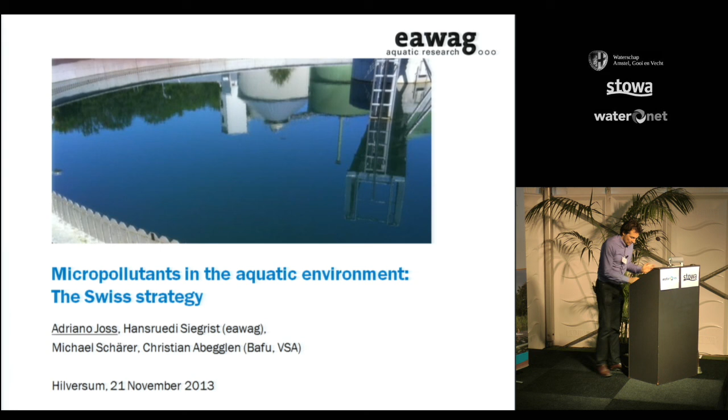But let me get to my topic, which of course is not my personal topic. I'm very happy to try and share a little bit of the logic which I understand behind the Swiss strategies on micropollutants. But of course it's a big work, so I just try to give you the best I can.

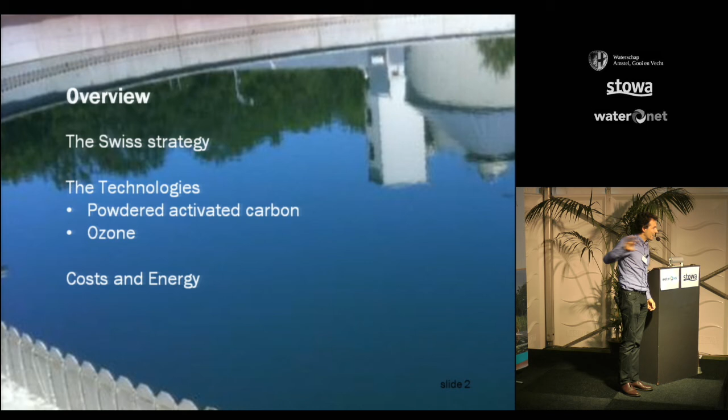My presentation will focus mainly on two parts. First, an overview of the Swiss strategy, and then a look at the two main technologies. Much has been said already on the technologies, but still I think it may be of a certain value to repeat the key points why we did choose these technologies.

The first picture is: what do we have to do? What are the big sources? And here with this picture I'd like to point out one thing. We think, or at least this is part of the Swiss strategy, that we're not only talking about pharmaceuticals. It's a lot of compounds.

We have agriculture there, we have consumer chemicals, we have chemicals used in facades. It's a big wealth of compounds. At the moment we do not really have clear evidence which group of compounds are really the ones that bother.

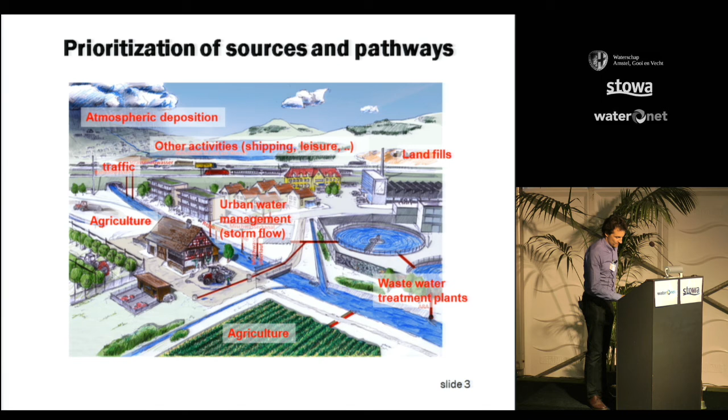So we're facing a lot of sources, a lot of compounds, and we're kind of lost. So what did we do? We did an exercise like was presented before by Barry Pieters or Victor Merch, but on a whole nation level, which in size is not very much different from the Netherlands or from North Rhine-Westphalia.

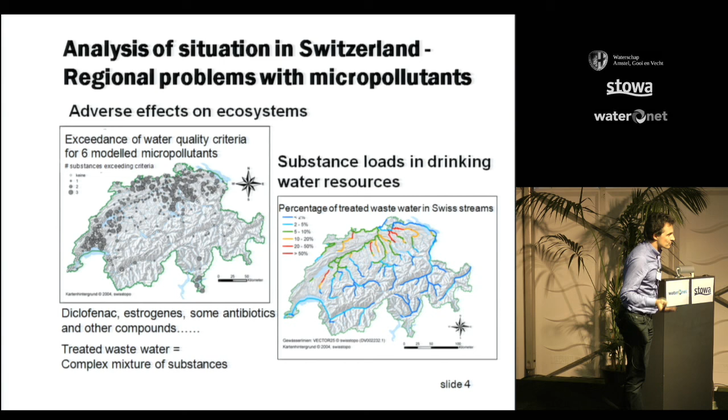We saw in this study, looking at which rivers, due to dilution and discharge, we expect concentrations higher than the effect concentrations we find in the lab. And here is a map of the Swiss rivers, colored in red where those rivers have the highest amount of wastewater in them.

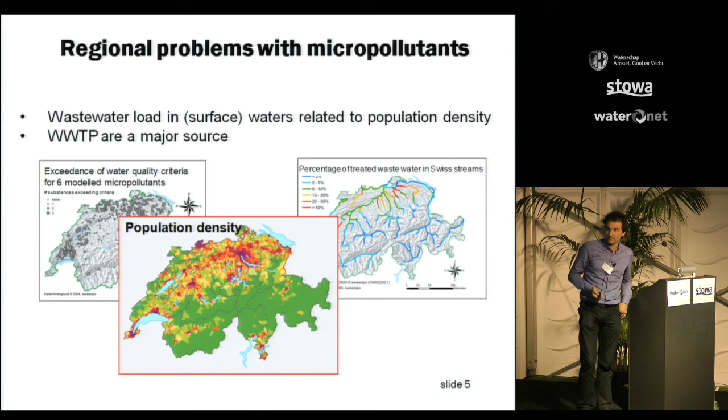And this is the basis of a political discourse, saying well, on this basis we have to do something. Now the first question posed politically is: what could we do? If we were doing something, how would we control it? What would be the goal of a removal?

The studies here - I will not go all the way into details - look at the sources of pollutants, the water bodies, doing a risk assessment, and then evaluating possible measures. This is all summarized in there.

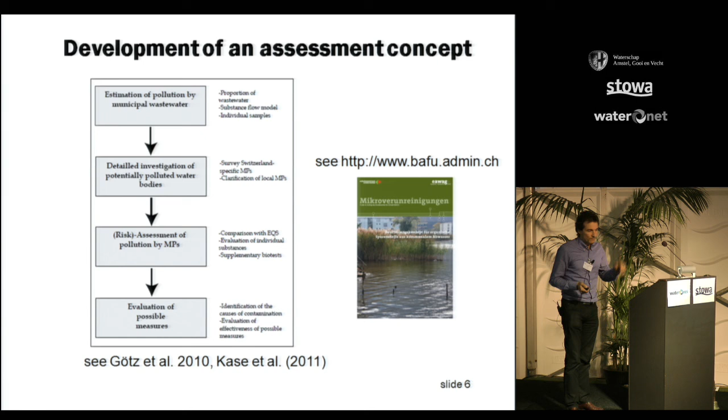The take-home message, or the key outcome of this study, is: yes, we do have 6 compounds which we think are representative of a whole palette of compounds that basically represent the anthropogenic load going through wastewater treatment and into the rivers. So with this study we are convinced we can formulate a target of what we want to remove, and we will be able to measure whether these targets are reached.

The next question is what to do - which technologies, and how, and where, and so on. We'll come to talk a bit later on the strategy, but there is a report which I think is quite nice because it summarizes why some technologies are currently prioritized.

These are powdered activated carbon and ozone. We think that, at least for the moment, these are feasible solutions, these are payable solutions, and this report shows how they would then be dimensioned. So this is summarized in here.

You can download it. I think the English version is not available, but I'm sure the Dutch are very good with languages, and German will not be a problem, or you can go to the French version.

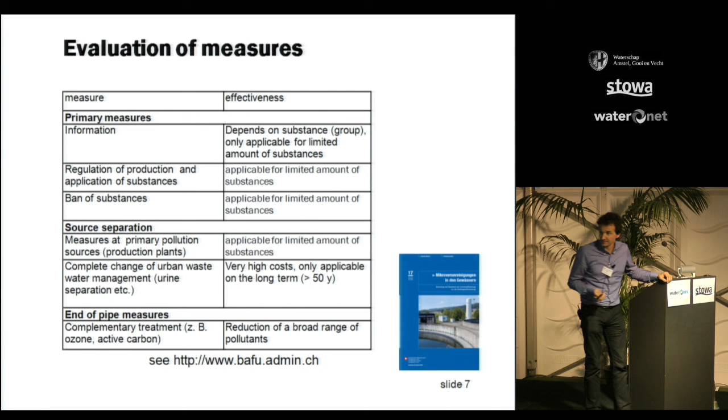Besides refurbishing wastewater treatment, which will be the rest of this talk, I want to make sure that wastewater treatment is not the only focus. Besides that, we do look at source control, and there are ongoing political measures, mainly on green chemistry, on registration and regulation of compounds, on trying to have an informed public which consumes where it makes sense.

But in general, the study clearly showed that all these measures are normally long-term measures, while the implementation of upgrading wastewater treatment plants is termed an easy, quick solution. We can do this rather fast. The measures we will be talking about are to be implemented in the next 20 years, starting from probably 2015.

Then it's thousands of substances. If you think of how long it took for the REACH regulation to be put into place, and how long it will take for the REACH regulation to cover the most important chemicals, we're talking about decades. So going by regulations is a very important step. It's absolutely not forgotten, but it takes probably more time.

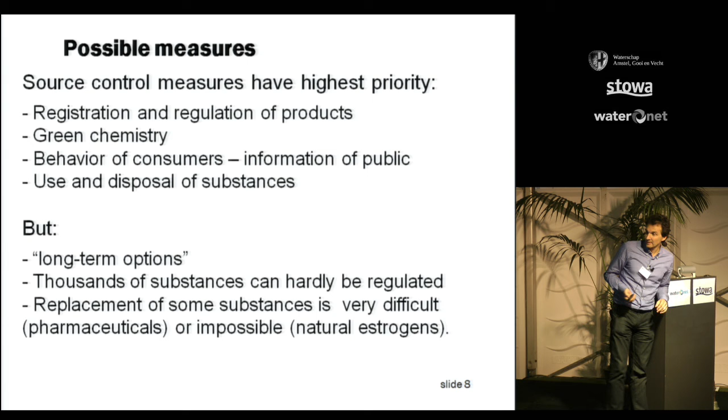Now, what is the ordinance that currently is being discussed in the Parliament? This draft is pretty likely to be passed in a few months. It's very difficult to do a prognosis on when it really passes because it's a political process. But according to what I've been told from the capital city, Bern, it really looks like it's pretty close to going through.

Well, the first key issue is, yes, wastewater treatment plants are recognized, like Viktor Mertsch said, as a key source of pollutants. Then the problem is not everywhere - where we have small rivers and high population, this is where the problems really are. So like Viktor Mertsch said before, the strategy will not be that everybody has to do it, but only selected plants.

Which ones? Well, in Switzerland we're probably around 100 out of 750, so it's a bit less than in North Rhine-Westphalia. Plants will have to be refurbished - which ones? All the big ones, because there the cost effectivity is best. Then also smaller ones from 8,000 person equivalents going upwards, if they discharge in sensitive water or if they discharge in waters serving as drinking water sources.

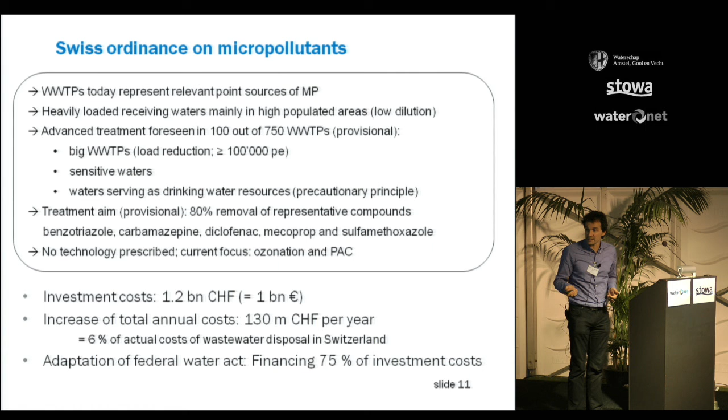So what looks like a very big number tends to not be that big of a sum if you look at what we are already doing today in total. And part of the law is that 75% of the investment costs will be covered basically by tax money, by statal money. The other 25%, as also the operating costs, will be covered by the local municipality. This is what is currently being discussed politically and hopefully gets through in the next couple of months.

Energy and costs - this is a big issue. There is a lot of discussion, for example statements like ozonation costs a lot of energy, it's a waste of energy. We need to look at climate, and climate is priority here.

This was discussed and will still be discussed. The numbers we are showing here in terms of electricity, energy consumption, and cost consumption allow a very clear conclusion, from my point of view. If we have an environmental benefit of advanced treatment, then we can count electricity and cost as probably negligible overall. If we do not have an environmental or drinking water quality advantage, then it's not insignificant money, it's not insignificant additional energy that we consume, and then we should rather not do it.

So what are the numbers? The electricity consumption for wastewater treatment would increase by probably 10 to 30% if we do advanced treatment for micropollutant removal. But this is only 0.1% of the national electricity or national primary energy consumption. So if we as a society want to save energy, wastewater treatment is not the place to focus on - it's an industry sector like any other. But if we get a trade-off from this added electricity consumption, this trade-off may be much more worth it than some added fuel invested in transportation, for example.

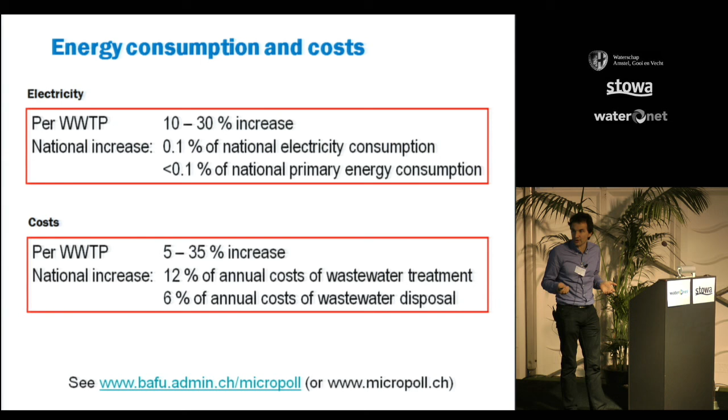In terms of costs, pretty much the same picture, depending on the size of the wastewater treatment plant, and a little bit also on process choice and local conditions: between 5 and 35% increased costs. In terms of annual costs, that's 12% of the wastewater treatment cost, or 6% of the total wastewater disposal cost including sewer costs.

The ongoing work - one thing that struck me a little during this political discussion in Switzerland, from quite the very start, was that the Federal Office of the Environment did quite some piloting to confirm that ozonation and powdered activated carbon could be potential technologies, and what they would cost. But once this was shown, the political discourse never really was about whether to do something or not, but was always on the financing solution and which measures are to be planned - rather how to do it, not if to do it at all.

In Germany now the discussion is picking up pretty much, but at least for a year or so the discussion was still a lot ongoing about whether to do something or not, while in Switzerland this was never really a big issue on a political level. The detailed financing solution is still a little bit discussed. I don't know whether it may be possible that in the political discourse this will delay a final decision because a suitable solution has not yet been found - this is still possible.

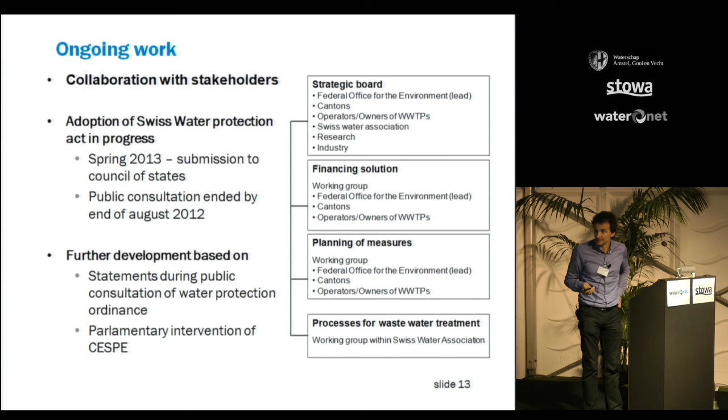This concludes the Swiss strategy, and now to the technologies. First, what do the technologies need to do? Well, we need broadband removal. We don't want to focus on estrogens or gadolinium only, or single compounds. We have a mixture of compounds occurring and we want a solution that actually covers this mixture, because currently we do not have a clue which compounds really matter and which ones don't.

Then transformation products are an issue. Some biological degradation to a far extent just transforms compounds - it doesn't really metabolize or mineralize the compound itself. So there is an open point on the relevance of transformation products. It's been looked at, and it will still be looked at for some years to come. Then the applicability - the personnel we have today operating the wastewater treatment plant must be in a position to operate the technologies. And then, of course, the cost benefit must fit.

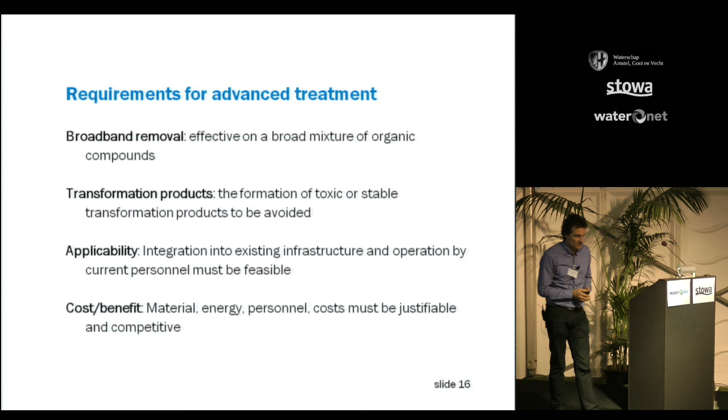What technologies are thinkable? Well, there is quite a palette: adsorption, biological degradation, physical-chemical treatment like nanofiltration, reverse osmosis - so dense membranes - and oxidation. A lot of technologies have been proposed, and I think we're looking forward to a time where further technologies are to be proposed, and we should be careful in looking at them. At the moment, at least this is our state of knowledge: powdered activated carbon and ozone stand out amongst the most cost-effective, for sure among the top ones, and in the following is a listing of why.

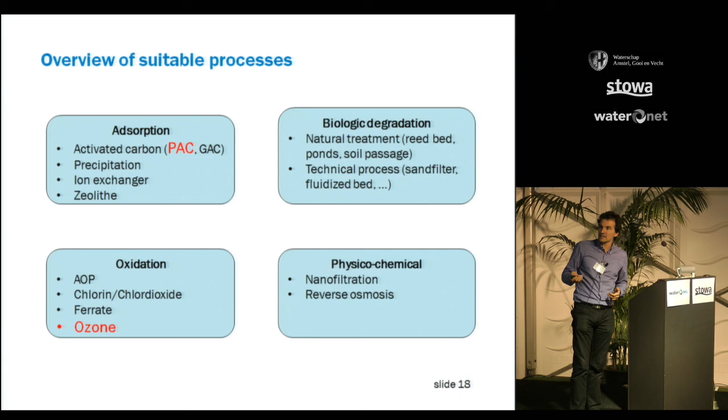The thinking is having at least two options. Whatever you come up with as new technologies, here is what you have to rate against. If you're better, very good, we're all very happy. Otherwise, we kind of stick to what we have. So, powdered activated carbon and granular activated carbon - I think your experience is further than ours, so there is not much sense in me talking about this.

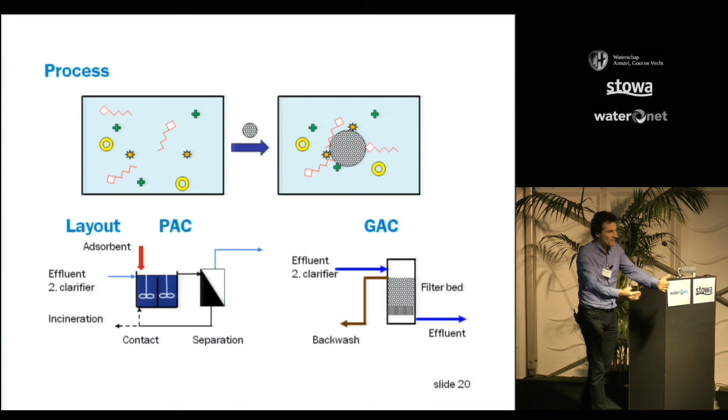Powdered activated carbon - the scheme here shall tell you it's meant to work as sorption only. Here we have a filter just next door which does biological degradation and sorption as well. Powdered activated carbon will never stay in a system long enough to really count as a growth media and then do biological degradation. So in an easy scheme, we have a reaction container and then some kind of means to retain the powdered activated carbon.

This increases your sludge production by maybe 10% or so, but this increases the efficiency of the activated carbon quite a bit. The rationale behind this is, to my knowledge, not very clearly shown - so a bit speculative - but very probably, if you recycle the spent carbon to the biology, you end up adsorbing some compounds which would compete with the target compounds. So the DOC level is a bit lower if you bring the carbon back, and therefore the efficiency ends up being higher. But please take this interpretation as a bit speculative.

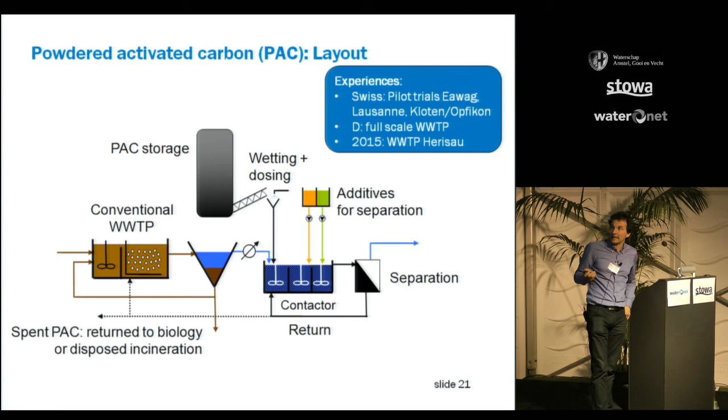What is the experience? Some piloting in Switzerland has been done at quite a decent scale, but in Germany we have full-scale wastewater treatment plants, which according to what I've been told is mainly because they have a discharge fee on the organic constituent of the wastewater discharged into the river. This actually in Mannheim and also in southern Germany pays for most of the activated carbon dosing, because the fee they would have to pay otherwise would be higher. In Switzerland, the first plant will go into operation in 2015.

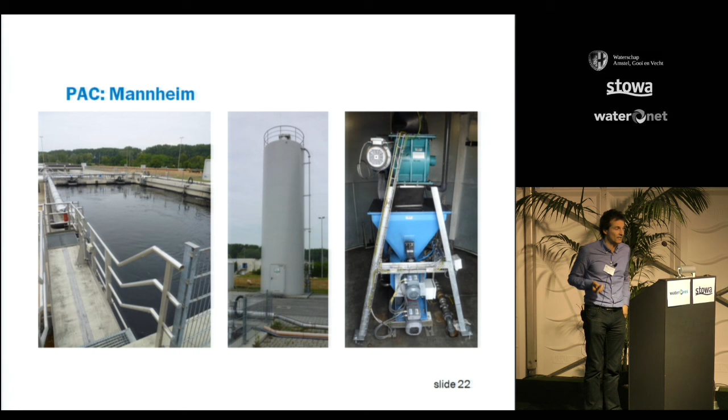A couple of pictures from the unit in Mannheim, where the carbon is recycled to the activated sludge, which then, of course, looks pretty much black.

This is for Swiss wastewater, which has a chemical oxygen demand, a COD of roughly 300-400 milligrams per liter. Compared to German wastewater, which is typically a little bit more diluted - I don't know how it is for the Netherlands, but on average it's rather diluted wastewater - it might be that if you go to higher wastewater concentration, the doses are a bit higher.

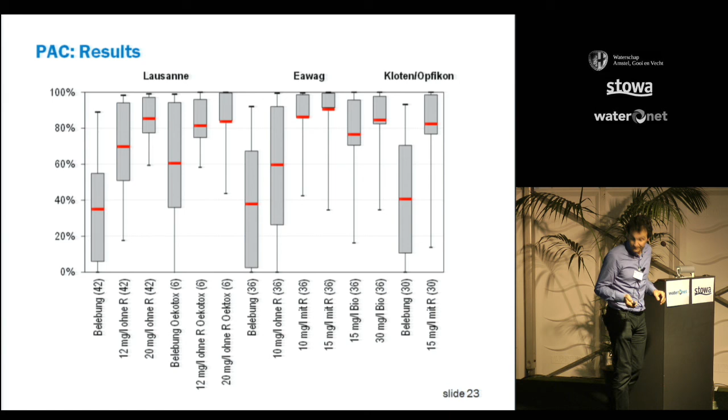How about the other criteria that advanced treatment has to comply with? Well, we have seen the broadband effectivity - this is very good, this is given. Transformation products - we have none, because whatever gets sorbed onto the powdered activated carbon goes onto the sludge.

The sludge is incinerated in the end, and within incineration we have complete mineralization to carbon dioxide and water. But we do have some powdered activated carbon loss in the effluent. This is still to be confirmed, how exactly to retain the carbon sufficiently. So this is a little bit of an open issue.

The applicability is good - this is shown in full-scale plants in Germany, that the operators can handle it. There are some corrosion and abrasion problems, so pumping may still cause slight problems, but it's expected from experience in drinking water that there are technical solutions. Then also the cost benefit, with between 5 cents and 40 cents per cubic meter of water - the cost effectivity is roughly given.

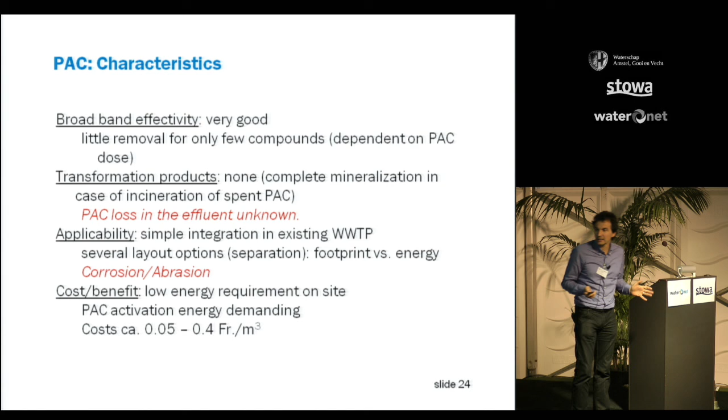Ozone. With ozone, the principle is that we chemically crack the compounds, and we're left with transformation products. A number of transformation products have been looked at in terms of biological activity, and the great majority that we've seen up to now have shown to, on first ozone attack, completely lose their effectivity. These are estrogens, all the antibiotics that have been looked at, and a few compounds more. As soon as they're attacked by ozone, their effect just disappears.

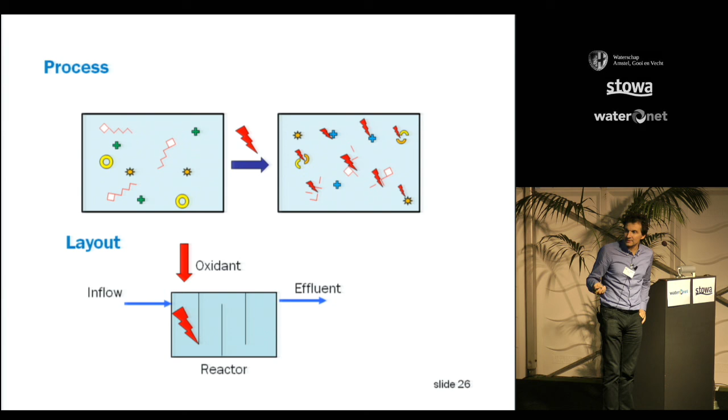The reactor - how does it look like? Well, we have to add the ozone, and then we have a chamber where ozone is brought into solution, and then a plug flow reactor where the reaction can take place. A little bit more in detail, we need to store the oxygen, because normally - only in small plants - you would extract the oxygen from the air.

If you have a bigger plant, it's better to truck in the oxygen. Then you have a generator, then a bubble column. This has to be 4 meters or more, and you have a plug flow reactor with about 20 minutes of contact time. You end up forming reactive compounds like aldehydes and ketones, and that's why, in Switzerland at least, we advise having a sand filter afterward. This sand filter doesn't retain particulates, but grows a biofilm so that whatever reactive compounds come out will react there and not be discharged into the river. So this is the technology.

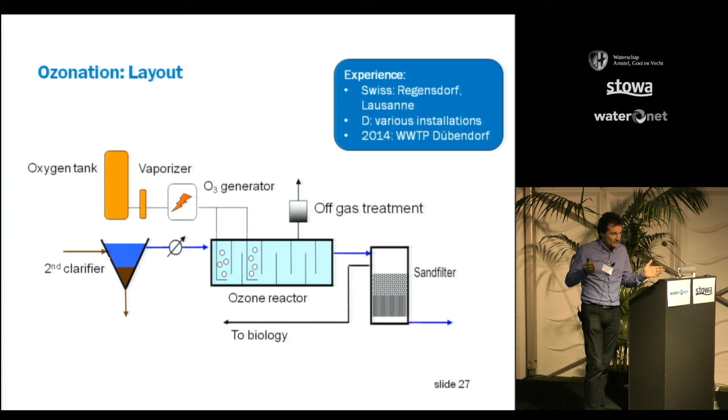Where does the experience come from? We did some piloting on full scale for 1 or 2 years in Regensdorf and Lausanne. Some plants on full scale are already equipped in France and Germany, and in January 2014, very close to EAWAG where we are, the first ozonation plant will go into operation. We also have between 5 and 10 research programs going on, to see how we control ozone dosage during rain weather, whether we can avoid a sand filter, or whether we're better off putting a GAC filter here instead.

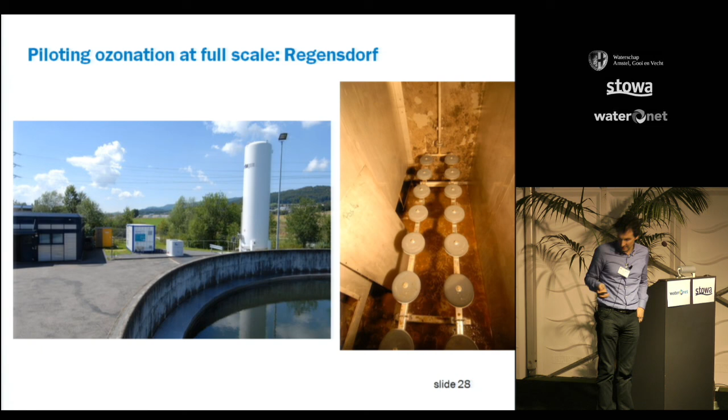This is a look into the reactor, and here is the oxygen tank of the piloting plant in Regensdorf. This was a 50,000 person equivalent plant. This is the generator, and in here are the filters, the ozone reactors.

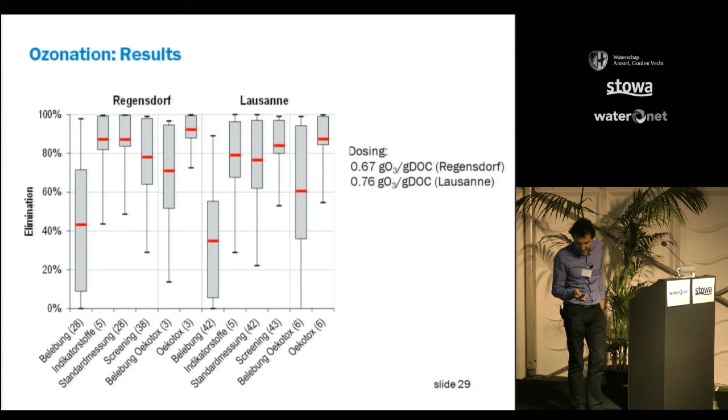So the criteria to rate ozonation: the broadband effectivity is very good in terms of primary reactions. There are transformation products formed, quite a multiplicity, and there's still a question mark on whether we've looked at all the relevant effects to really state that they have no relevant effect - but up to now we haven't seen any. Bromate formation can be a problem if you have a lot of bromide, so if saline or marine water intrusions are an issue, bromate could be a problem. Nitrosamine formation can be a problem in some places, but to a large extent it's solved by the sand filter.

So at the moment there's no reason for transformation products to be a no-go for the technology, and the applicability is good. The ozone reactor is quite easy for personnel to handle, with a bit of awareness and education around safety - ozone is explosive, ozone is toxic, but then you can handle the plant. The cost benefit is also a bit better; we calculate between 5 and 20 cents per cubic meter. It's a bit lower, but costs are not the key point in discriminating between processes.

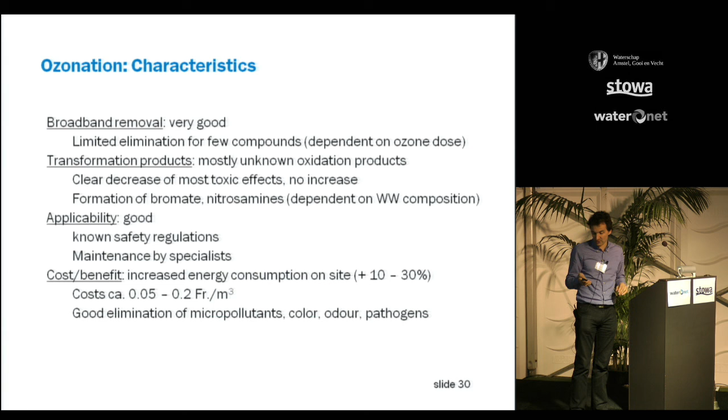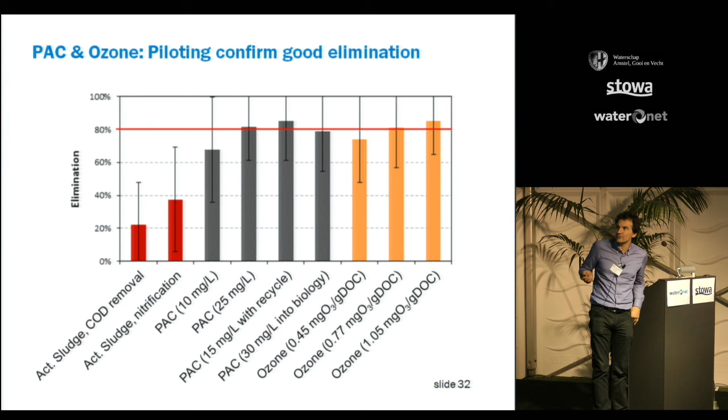One important fact for ozonation is that we get 2 or 3 log units of pathogen or microbe removal, whereas with powdered activated carbon filtration we normally get only about 1 log unit. So if bathing water quality is a big topic, this could matter for ozonation. Looking again at cost effectivity, with proper dosage - 10 or 25 milligrams of PAC, or between half and 1 milligram of ozone depending on DOC level - you can reach 80% removal, you can reach the goal.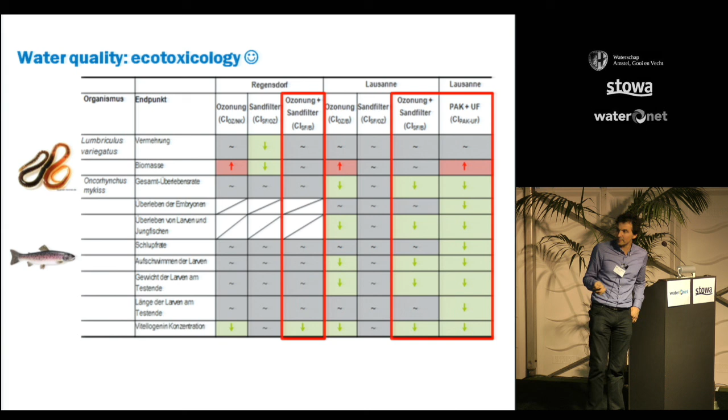Also, looking at the range of ecotoxicity measures - fish early life stage, worm effects, photosynthetic effects - on average you get better water quality; only in very rare cases does it worsen. As a more engineering-oriented person without much toxicology experience, I have the impression that not the last word has been said on which tests really monitor quality. There may be discussion in coming years on which tests are relevant. But at the moment we do see a clear picture: advanced treatment in terms of effect measurements normally gets a positive reduction, both in vitro and in vivo.

Costs and energy, we can put them again because they're quite important. If we compare ozonation and powdered activated carbon in a dosage typical for Swiss wastewater, we see that in terms of on-site consumption, ozone is a little higher than powdered activated carbon. But if we calculate primary energy, including the energy needed to activate the carbon, ozonation is a bit cheaper.

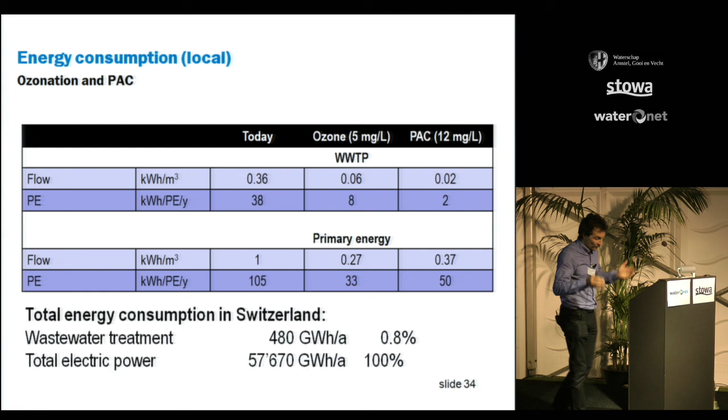But again, this is not the major point. The major point is that if we compare the consumption that advanced treatment for the Swiss strategy would consume to the entire electricity consumption of Switzerland, we see that we would increase electricity consumption for Switzerland by less than 1%.

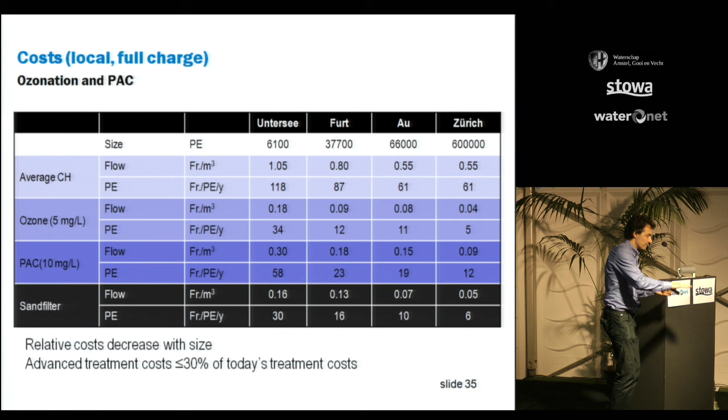The costs, again, here we did some cost estimation for small wastewater treatment plants, 6,000, or big ones, 600,000 person equivalents. You can find the numbers in your handouts. The key take-home message is the price is size dependent, and if you don't have a sand filter, this costs normally more than ozonation or powdered activated carbon. Also, if you have to refurbish a COD removing plant, upgrading it to nitrification costs factors more than implementing ozonation or powdered activated carbon.

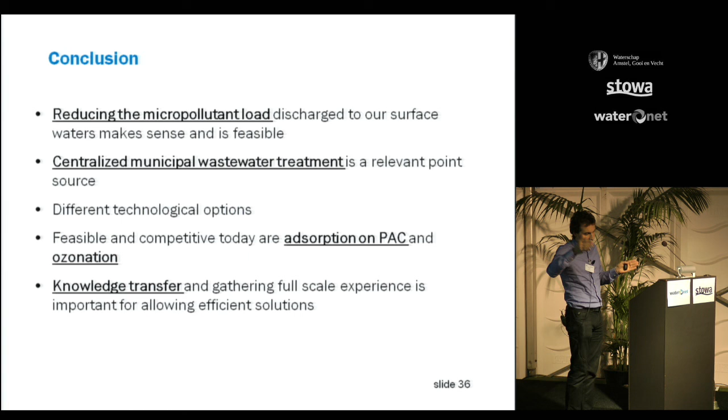With this, I'd like to summarize the conclusions. Reducing the micropollutant load is seen as relevant, and wastewater treatment plants are seen as a major source. There are different technological options that are feasible from a technological point of view and also from a cost point of view. Powdered activated carbon and ozonation are two options, and knowledge transfer and gathering knowledge is rated as very important. This is the main reason why the strategy will be implemented not in 10 years but over 20 years.

Thank you, Adriano, for your excellent presentation. It was quite impressive, I think. Other questions?

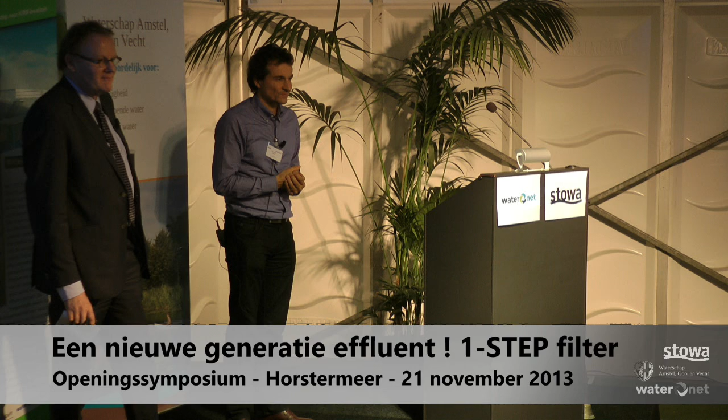I have one other question, if I may. Is it also... Did I say yes? Of course. Did I hear yes?

Is it also an idea to change the sand filter behind the ozonation for a granular activated carbon? Would that be even better?

Yes, these are the side stream studies that are going to take place in 2014 at the wastewater treatment plant of Dubendorf, where we have a full-scale ozonation. There is already a sand filter implemented, and on the side stream, on a pilot scale, we do a moving bed bioreactor. We also do granular activated carbon. Yes, it's an open question.

Thank you. Yep. Okay, are there any questions? I thought I already noticed that there were. Yes?

Adriano, you mentioned that the difference between ozone and activated carbon was also the removal of pathogens. Is that an issue in Switzerland? Disinfection, perhaps also antibiotic resistance of bacteria and so on? It is an issue that is becoming bigger and bigger.

I mean, Victor Merch, I think he left, isn't it? Just before he left, he mentioned a case of the brewery where people, I think two co-workers, died because river water was taken for cooling the building, and they got an infection, and it could be shown that the bacteria that infected the persons actually came from the wastewater treatment plant.